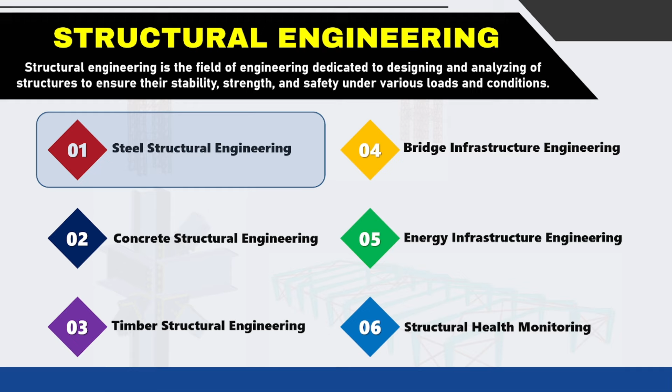Let us see various categories, various types of structures which come under steel structural engineering. The most important type of structure are industrial facilities, pre-engineered buildings. These are huge industries, huge PEB buildings made out of steel. Then you have steel frames for residential buildings, some of which are made out of steel skeleton, steel structure, steel framing.

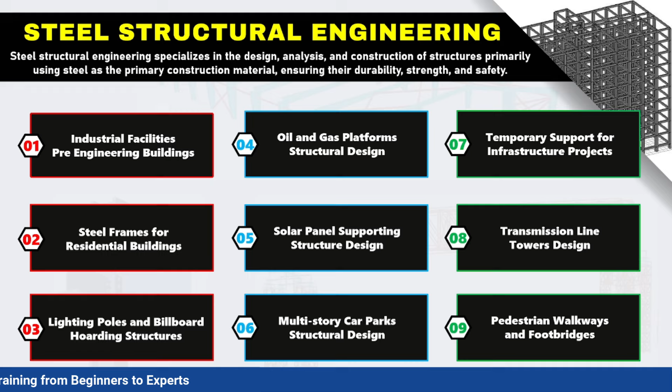You have lighting poles, billboard hoardings, advertisement hoardings whose structures are also made out of steel. You have oil and gas platform assemblies, solar panel supporting structural design, multi-story car parking, temporary structures for infrastructure projects, transmission line tower design, pedestrian walkways, and footbridges. These are a few types of structures made out of steel.

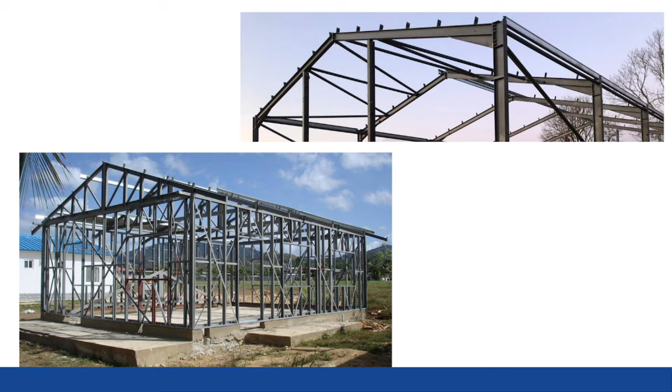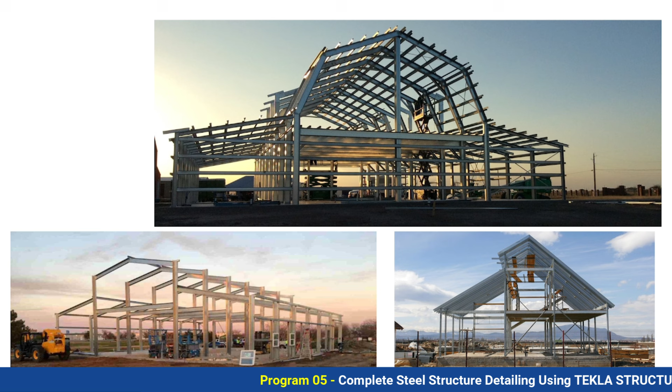Let us see some images to understand what a steel structure looks like. Here you can see steel warehouses, steel structures, industrial warehouses, multi-story industrial warehouses. You can also have these kinds of steel buildings, multi-story steel buildings, where the basic framing is made out of steel.

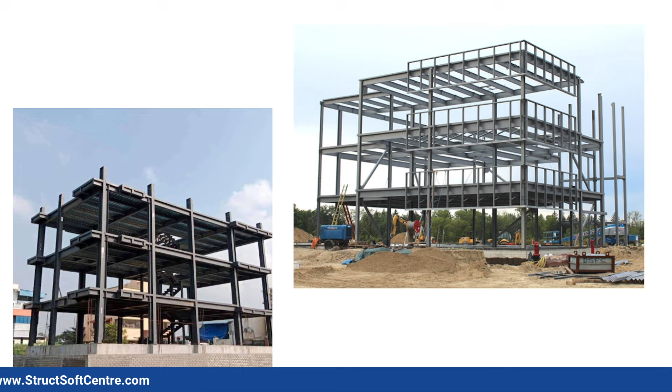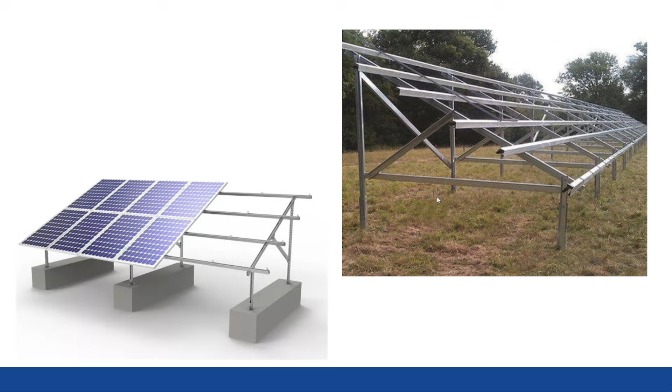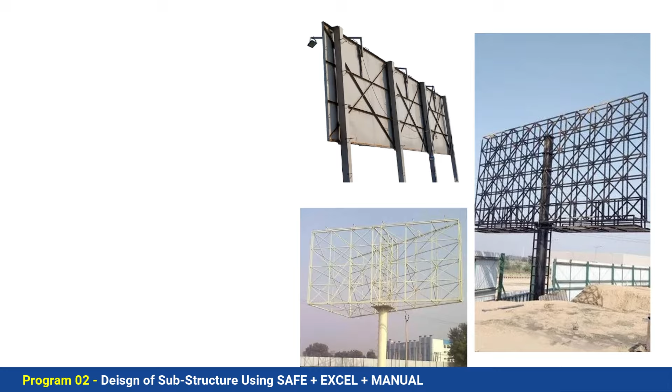Then you have transmission tower lines, billboard hoardings, advertisement hoardings, walkways, and foot over bridges. So these are a few examples of steel structures.

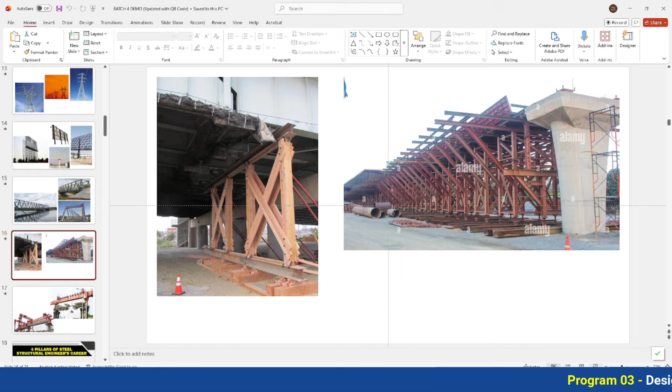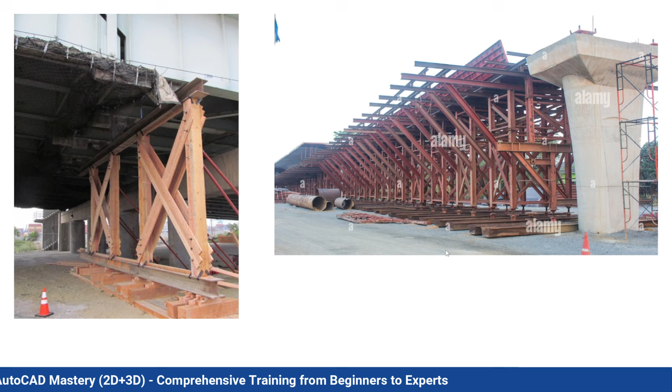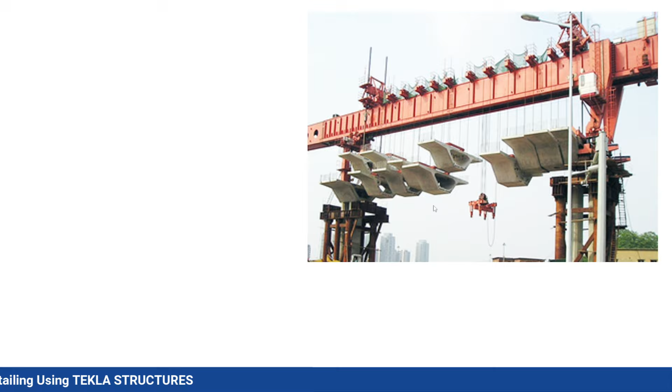Let us continue. So until now we have discussed various kinds of structures basically made out of steel. You can see here temporary structures, supporting structures, and launching girders. When constructing a segmental bridge, you have these launching girders which lift the precast concrete segments over here, and then they are connected by tendons. So this is also a steel structure, a launching girder.

So we discussed until now some examples of steel structures. The most famous amongst them are the pre-engineered buildings, steel buildings, steel warehouses, and some projects where infrastructure is being developed.

Now let us understand the four important pillars of a steel structural engineer's career. If you want to be a successful steel structural engineer in the market, these are the four skills you should have. Number one, you should have proper structural conceptual knowledge; all your concepts related to structural engineering should be very clear. Secondly, you should have proper knowledge of the design codes, the codal provisions used in your country where the structure is being constructed. The knowledge of these codes is very important.

Third, you have structural softwares. Nowadays we have huge and complex structures; it is not possible to design them manually as you have time constraints, and the accuracy required in these huge structures is very high, so you need the use of softwares. And finally, you should have experience working on real world projects. So these are the four important pillars which you should be strong in if you want to be a successful steel structural engineer.

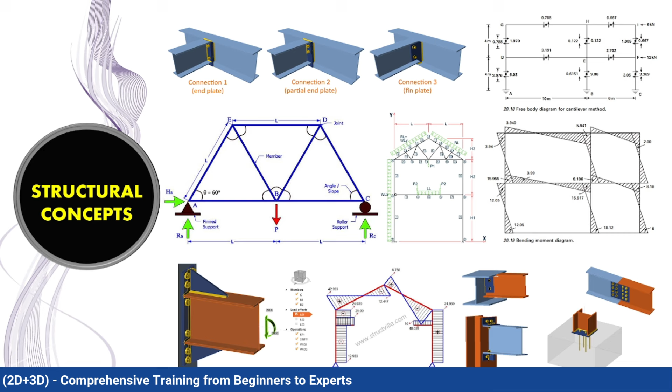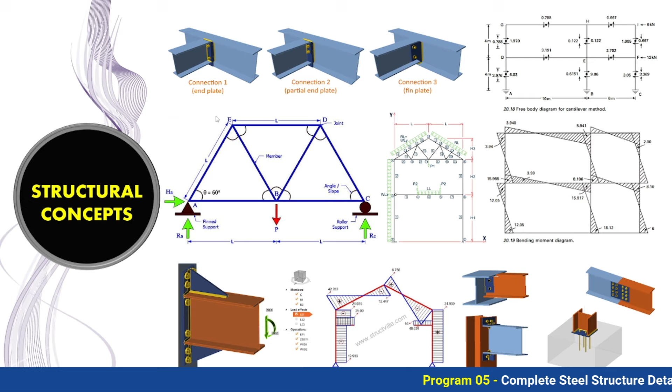Now let us understand each of these pillars in detail. So what are the structural concepts? Structural concepts deal with your understanding of how load is applied on the structure, how you can draw a free body diagram, what is SFD, what is BMD, what are the reactions from the applied load, what are the types of supports, whether you want a pin connection or a weld connection, a shear connection or a moment connection, and what kind of support you should have, whether a pin support, a roller support, or a fixed support. These are some of the basic structural concepts, and as a structural engineer you should have answers for all these questions.

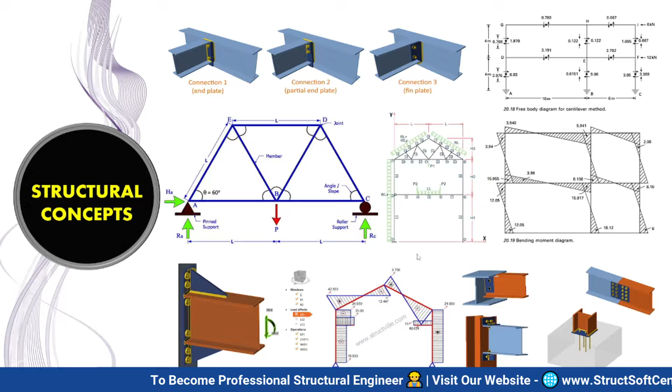Next, design codes. If you have all the knowledge related to structural concepts, you should also be aware of the design codes specifically in your country. We will discuss from the point of view of India. If you have any project in India and want to design a steel structure, you should have knowledge of the codal provisions. In India, we have IS 800 2007, the General Construction in Steel Code of Practice. If you want to design any steel structure in India, the design should satisfy this code. So as a successful steel structural engineer, you should have proper knowledge of this code.

Then you have other codes like IS 875 parts 1, 2, 3, 4. This deals with the loading being applied - it could be dead load, imposed load, wind load, snow load. And we have IS 1893, the code which deals with the criteria for earthquake resistant design. Then we have IS 808, another code which deals with the dimensioning of hot rolled members like beams, columns, channels, angle sections. This is the standard material available in your country. What specifications should that standard material meet? Those are mentioned in IS 808 - the cross-section properties of the members are mentioned in this code. So if you want to be a successful structural engineer, knowledge of all these codes is very important.

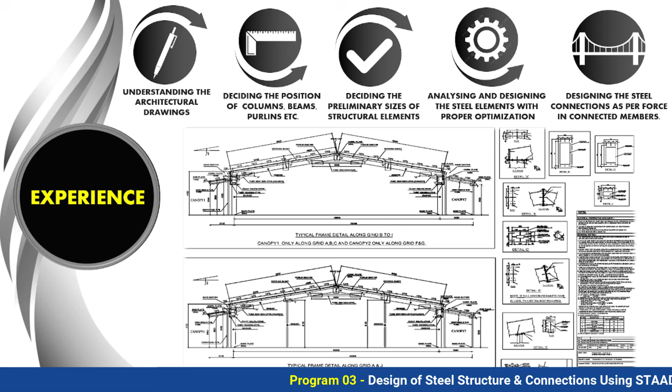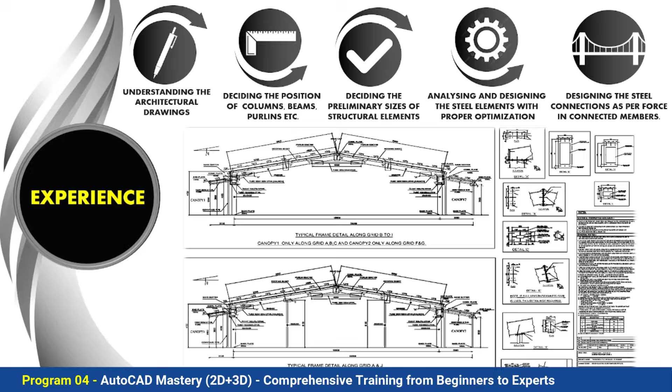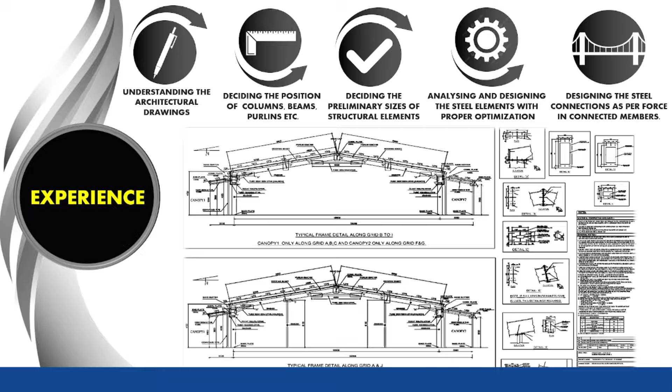Finally, the most important thing is experience. Until and unless you have experience working on real world projects, you will not be able to be a successful structural engineer. You should understand architectural drawings, how to read them, what inputs you get from the architect, from your client. Then based on those drawings, how you can decide the position of your columns, beams, purlins, how you can decide the preliminary sizes. Then finally, after applying all the loads and analyzing the structure, how you can optimize your steel design, and finally how you can give the output, give your drawings to your client, to the architect. This will only come after experience, when you work on real world projects, the actual projects.

So now I have a question to all of you. Do you have command over all these four requirements? Do you have good structural conceptual knowledge? Are you proficient with the design codes? Do you have knowledge of all the design codes? Do you have knowledge of the structural softwares? And do you have experience working on real world projects? I want everyone to answer in the comment section - do you have command on all these four requirements? Please answer in the comment section and let me know. Yes, no, what are your thoughts? Do you have knowledge on all these requirements? Do you have good structural concepts? Do you have a proper understanding of the Indian codes? Are you aware of these softwares? And do you have experience working on these projects? I want everyone to answer yes, no, whatever is your answer. Let's see.

Some of them have intermediate knowledge. Some of them have good knowledge. Most of you do not have knowledge related to steel structures.

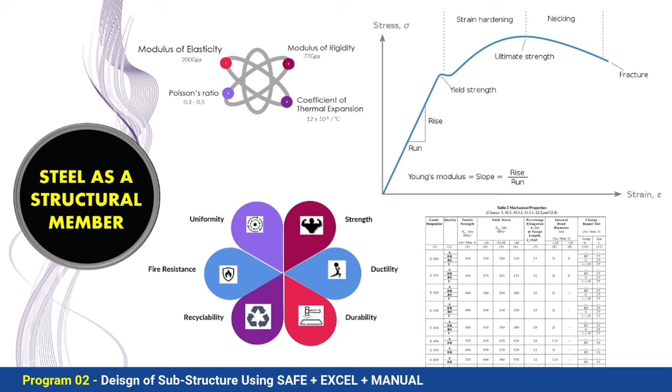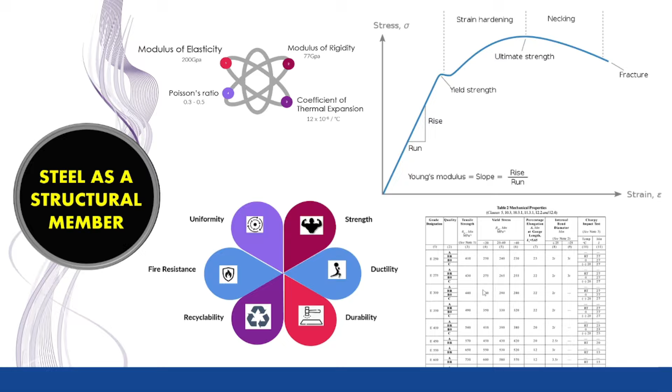Let us see what this is. Starting from the structural member, steel as a structural member, we will understand from the very basics the properties of steel, the stress strain graph, the advantages of steel, the various grades of steel available, and how you can use steel as a structural member.

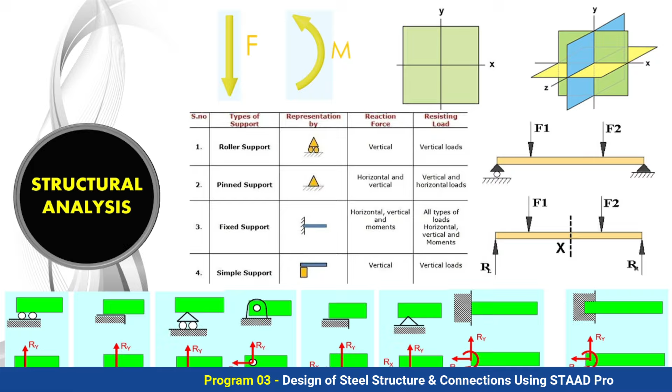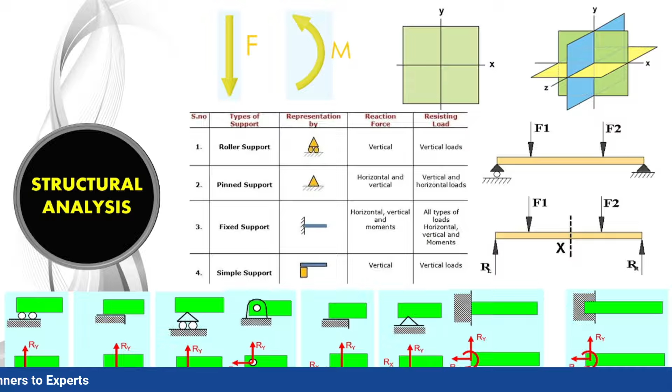Then we will move towards structural analysis, understanding how force is applied on your member, how moment is applied, what is a free body diagram, how you can convert your actual structure into a model in STAAD.Pro, what kinds of supports there are, and how you get reactions from those supports. All these basic conceptual things we will be covering, including shear force diagram, bending moment diagram, and all.

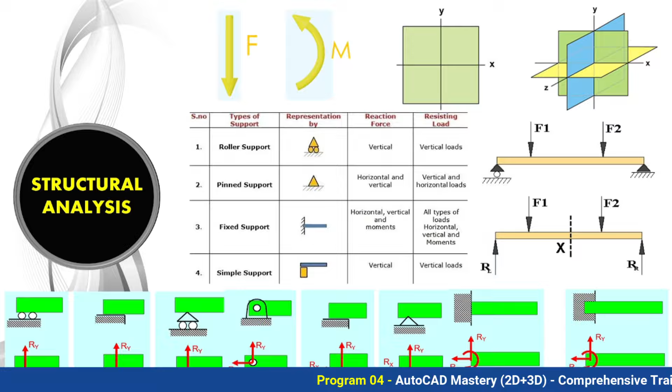Then we will move towards STAAD.Pro, the process of analytical modeling. From the very beginning, for people unaware of the software, we will start from preparing the geometry, applying the properties, applying the material, applying certain specifications, deciding the type of support, applying various kinds of loadings on your structure, then analyzing it for the given loading, then designing it based on the design code, and finally seeing the results. We will move one step at a time, slowly understanding all the concepts.

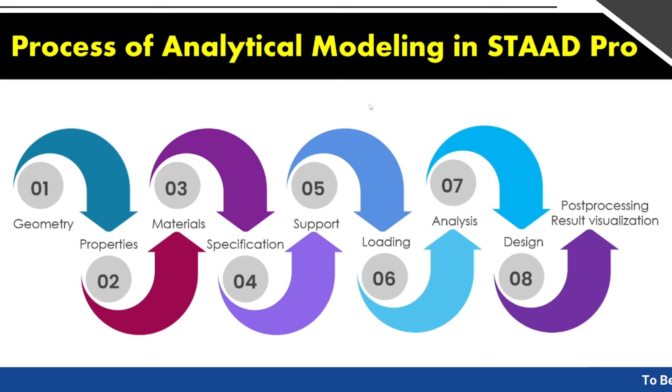Static and dynamic analysis in STAAD.Pro. We will start from 2D analysis, apply loading over it, and check the reactions. We will validate the software with manual calculations, seeing how the hand calculations match perfectly with the STAAD.Pro software. Once we understand that, we will be confident in using the software.

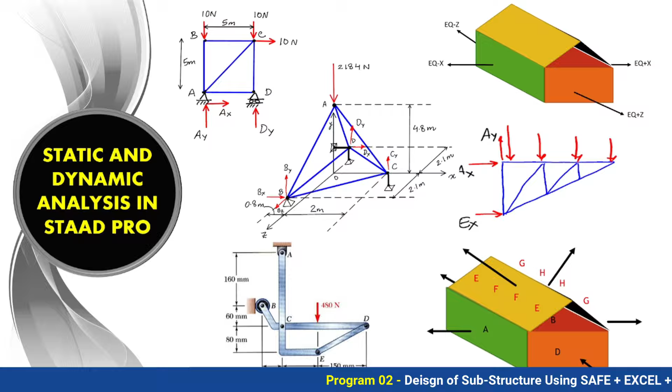We will be applying loads like dead load and live load, which are generally categorized as gravity loads on your structure. We will also be applying loads like wind load and earthquake load, which are categorized as lateral loads on your structure.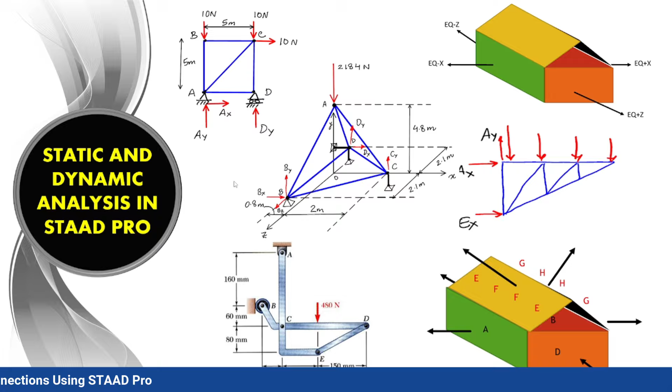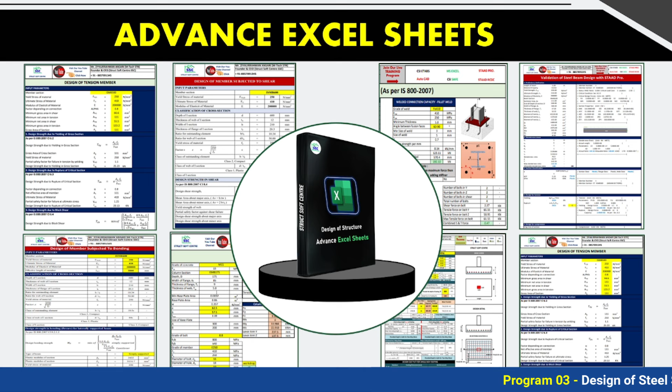I will also be sharing with you some advanced Excel sheets, which I have prepared by myself and my team. These Excel sheets will be very useful when you want to apply loading on your structure, apply load combinations, or apply certain design parameters. This Excel will be very useful and all these Excels will be shared with you.

After completing the beginners level, all of you will be confident in designing and modeling any kind of steel structure in STAAD.Pro and applying all loads over it. Once we complete the beginners level, we will move towards the intermediate level.

Intermediate level will specifically focus on designing of the structure, understanding the codal provisions, and designing of the connections. In beginners level, we dealt with analysis, and in the intermediate level, we will deal with the design. This is a proper systematic way in which we will progress. Let us see what the intermediate level would be covering.

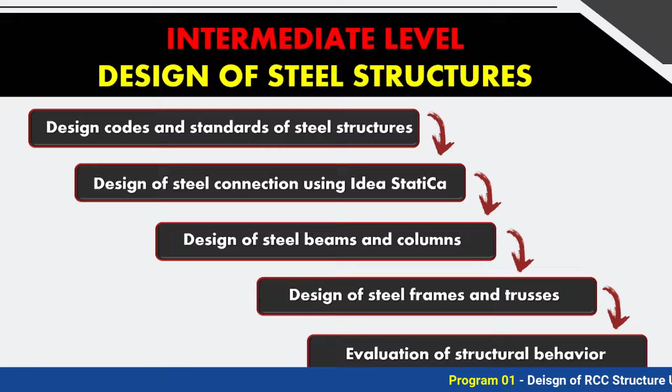First, we will understand the codal provisions IS 800, IS 875, IS 1893 in detail. We will validate the manual hand calculation for design of beams and columns with the STAAD.PRO calculations. We will be using Idea StatiCa software for designing of the connections. Finally, we will also understand how you can evaluate the overall structural behavior. Let us understand them step by step.

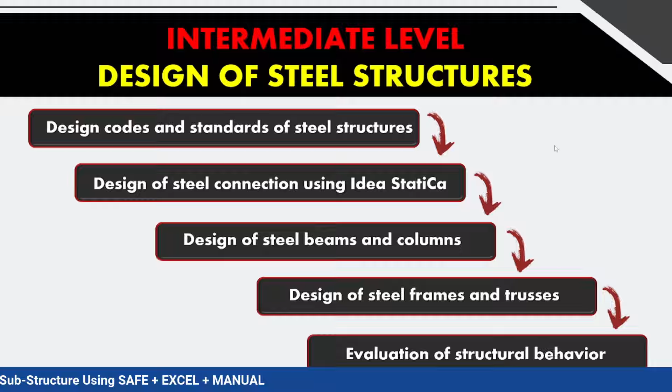Design process in STAAD.PRO - this we will deal with in detail. Whenever you are designing any kind of member in STAAD.PRO, first it will check its slenderness, then classify the member based on section classification, then the member will be checked for tension, then compression, then shear, then bending, and finally the combination of all these forces will be checked.

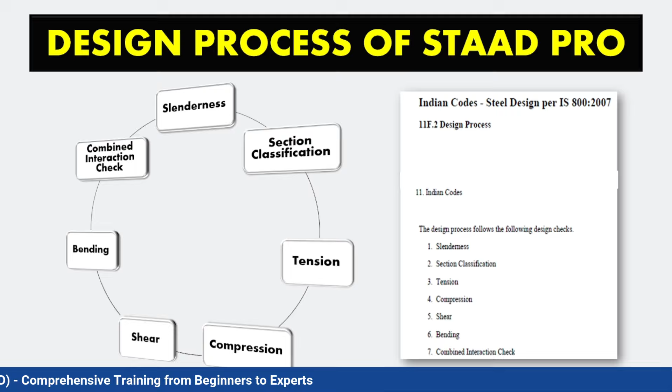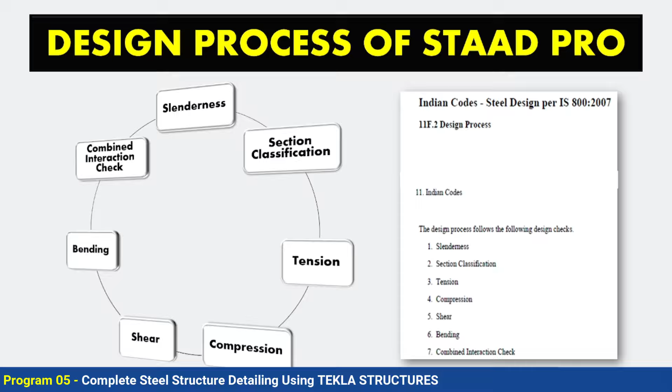This is the brain of your STAAD.PRO. This is the back processing which happens in STAAD.PRO. So we will not just understand how to use this software, how to manage it, how to click buttons. This is not just a software learning course. We will understand as a structural engineer what happens behind the software, how the software gives you the answer, what the software does. You should be able to understand what is being done by the software. So all these things we will be understanding in detail and we will validate these results with our manual calculations.

Many of these courses only teach you how you can click on the buttons and design any kind of structure. But this is not at all important. The most important thing is to understand how the software behaves, how the things are being done.

Design parameters in STAAD.PRO - STAAD.PRO is just a tool, it is just a software. If you give some wrong input to it, you will get the wrong output. The most important thing is to understand what inputs you give to the software. So if you want to design your structure based on the Indian codes, there are certain design parameters which you should mention to the software. 90% of the engineers are unaware of these design parameters. They don't know how these design parameters act.

I will be teaching you each and every design parameter in detail. Here I have just listed a few of them, but in our course we will be discussing each and every design parameter related to the Indian code IS 800, and we will understand the importance of each and every design parameter.

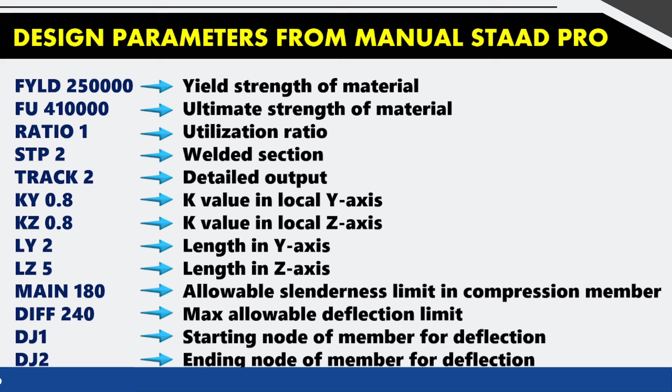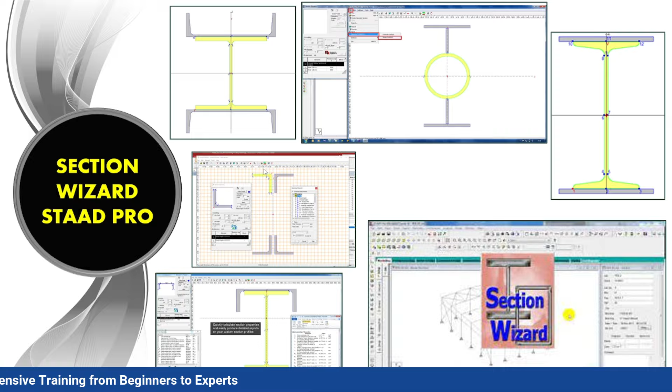Then the section wizard - this is the tool which makes STAAD.PRO stand out in the market. This is a very important tool, section wizard. Now you can see whenever you are designing any kind of steel structure, most of the members are not general members - you might be having combinations. For example, here you can see there are four angle sections which are connected. In the above figure, you can see you have I section plus channel section. Here you have this circular section plus I section.

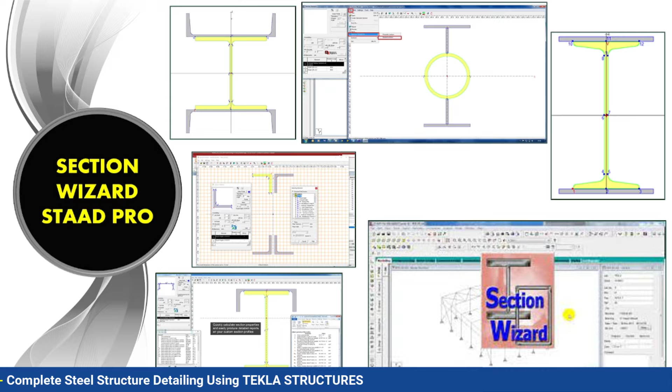Here you can see you have I section plus top and bottom plate. You have I section and a channel. So this is a tool in STAAD.PRO called section wizard. This tool is capable of designing your structure also for these complex custom modified members. So we will understand how you can prepare these custom modified members and we will be designing our structure for these members - not only the standard members but also these complex members which we will be preparing by using section wizard. I will be teaching you this tool in detail and I will also explain when you can use these custom modified members.

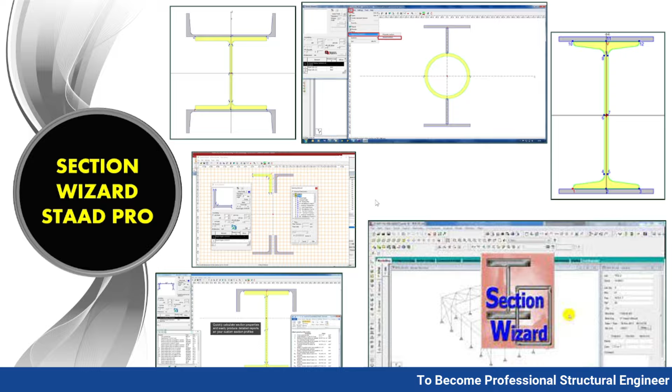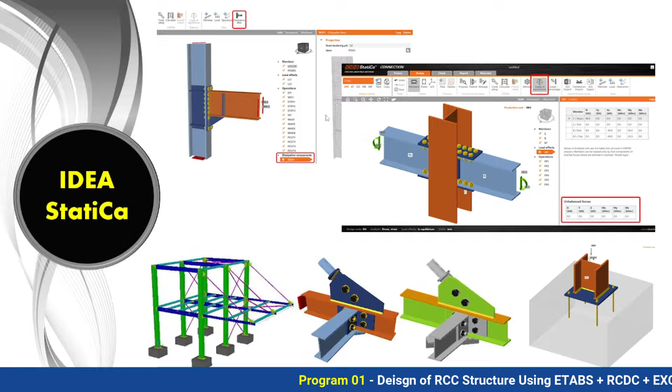After designing of the members, after designing of the structure, the next topic is the designing of the connection. In STAAD.PRO, only the member will be designed, but you also have to design the connection between two members. For example, you have a column and you have a beam - you also need to design the connection between them. You could have a welded connection or a bolted connection, a shear connection or a moment connection.

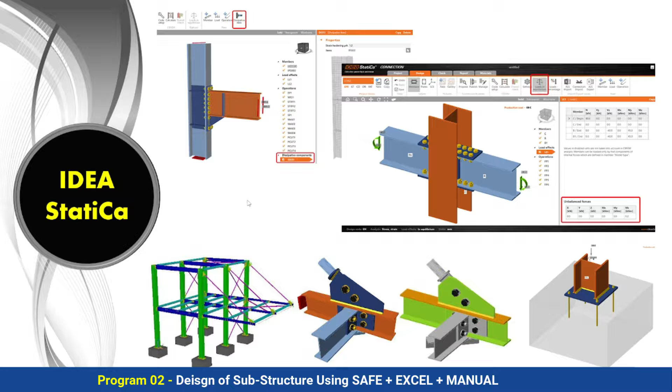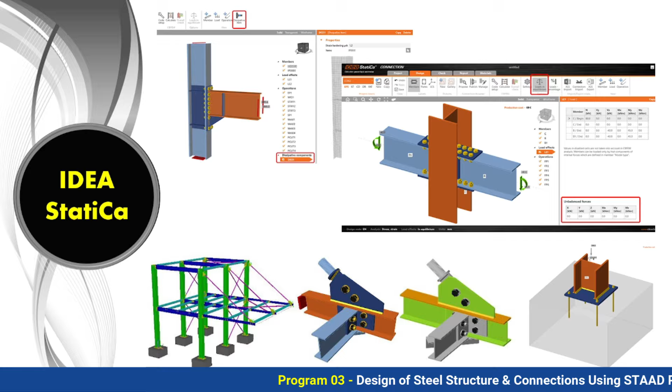All these things I will be teaching you in detail in this software called Idea Statica. We also have another software called RAM Connection, but that software is not very user friendly. Nowadays in the market, Idea Statica is becoming more and more popular, and all of the MNCs are now using this software. It is very user friendly and has a lot of advantage over RAM, so I will be teaching you this software in detail, which will help you apply for jobs in multinational companies.

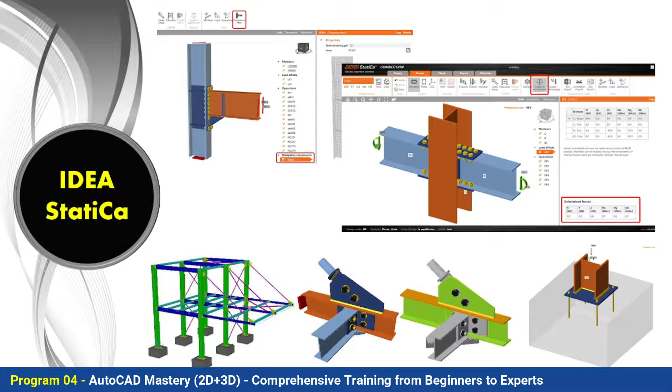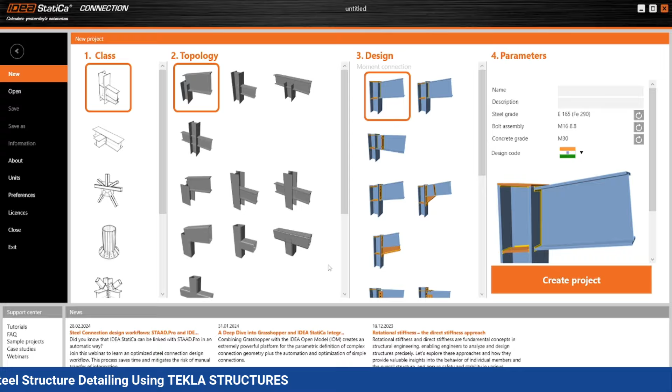I will be explaining all the conceptual things, whether you have to design a pin connection or a fixed connection, how you can design a shear connection, how you can design a moment connection. All these topics will be covered. This is the interface of Idea Statica. Here you can see shear and moment connections, all the differences we will understand in detail, whether you go for bolted connection or welded connection, whether you go for cleat angle or a moment connection. Roughly, let me tell you the difference.

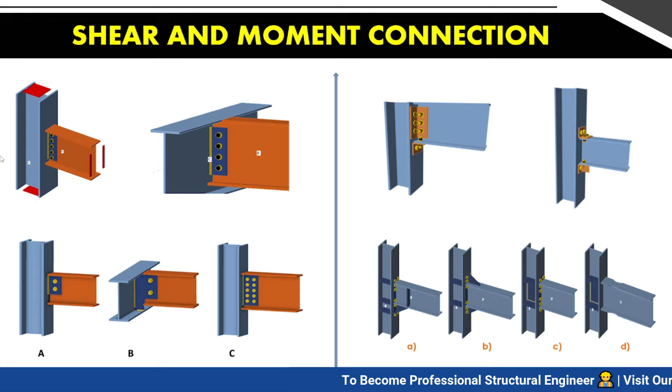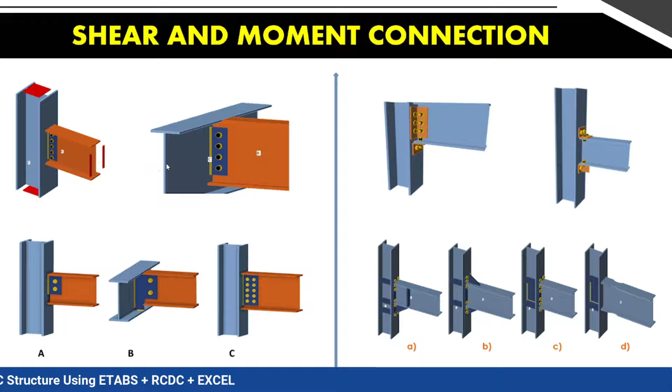Here on the left hand side you have a shear connection where only your web is connected to the column. Here also only the web of the beam is connected to the primary beam. Your flange is free, so this is an example of shear connection where your moment will not be transferred to the column or the beam. But in the second example, your web is connected as well as the bottom flange, and here top and bottom flange is connected. So these are examples of moment connection where your flange movement is not allowed, and the moment generated will be transferred to your column.

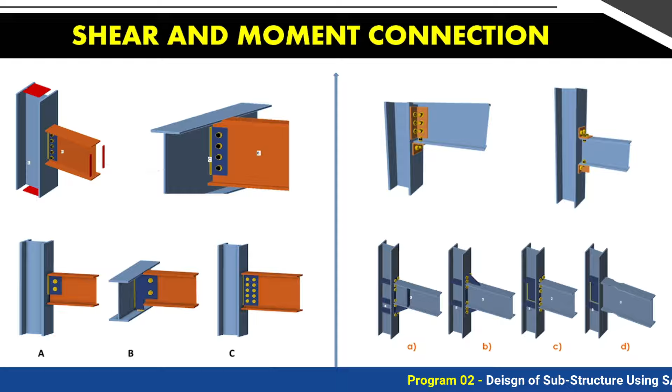So all these things we will be dealing with in very detail and understand when you can use moment connection, when you can use shear connection, what is the difference, what are the advantages, what are the disadvantages, all these topics we will be covering. When to go for welded connection, when to go for bolted connection.

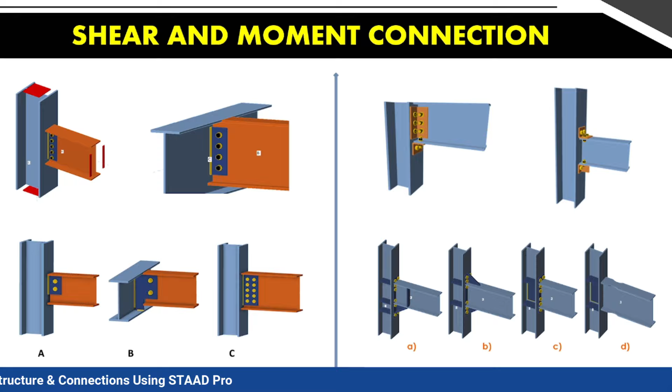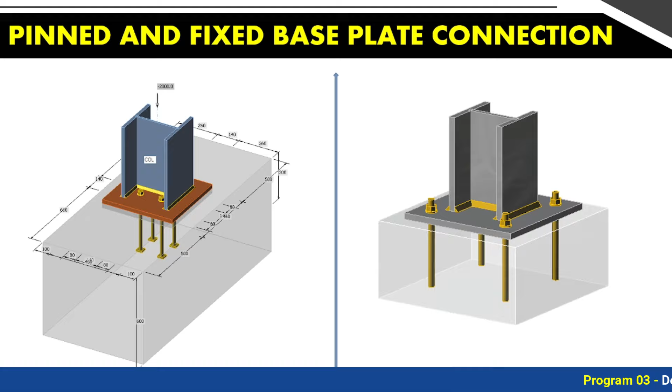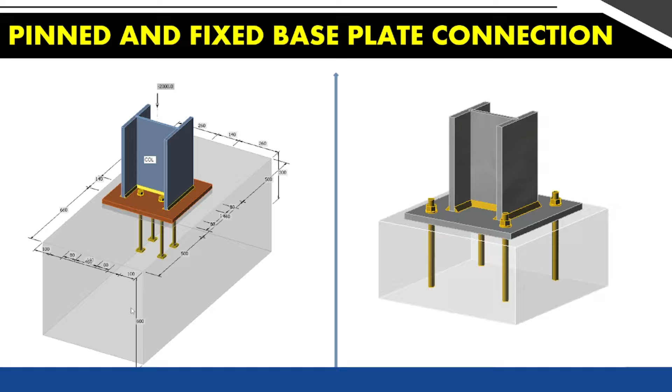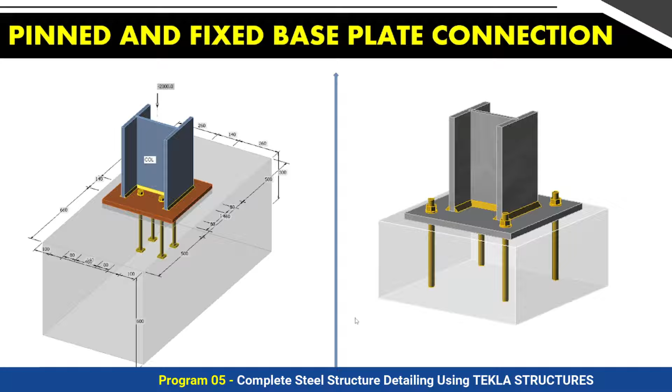Next thing, base plate. Many of you may not understand the difference between the pin connection and the fixed connection. On the left hand side, the bolts, the anchors, are near the web and inside the flange. In the second example, the anchors are outside the flange. So the first one, the left hand side, is an example of a pin connection where there will not be any moment transferred to your footing. But in the second example, the anchors are outside the column, and in this case the bending moments will be transferred to your footing. We will understand how all these things work.

After completing the beginner's level and intermediate level, you will have all the knowledge and will be capable of designing any kind of structure. In these levels we will complete everything related to analysis and design of steel structure and design of its connections. We will understand STAAD.Pro, Idea Statica and Excel, everything in detail.

And finally the advanced level. This is only there so that we can implement whatever we have studied in the beginner's and intermediate level. Here we will be working on real world projects, the actual projects which are constructed, and I will show you how you can proceed.

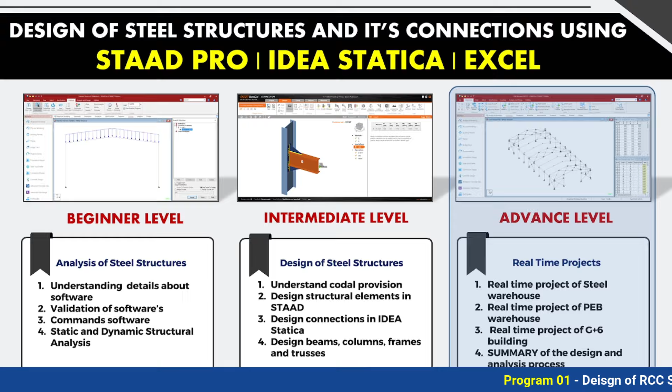We will be working on four projects: analysis and design of steel warehouse, analysis and design of PEB structure, analysis and design of G+6 steel building, and a summary of them. I will also be covering one truss and trestle assembly course.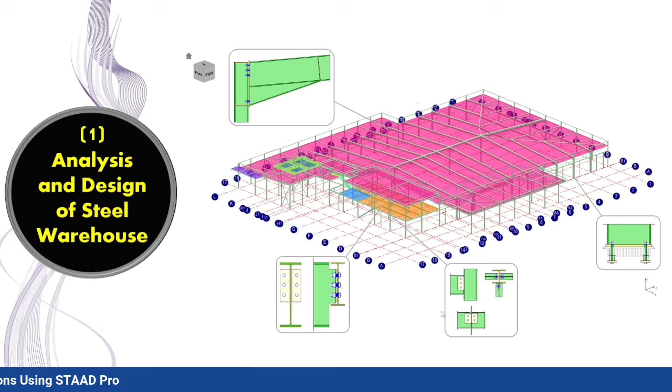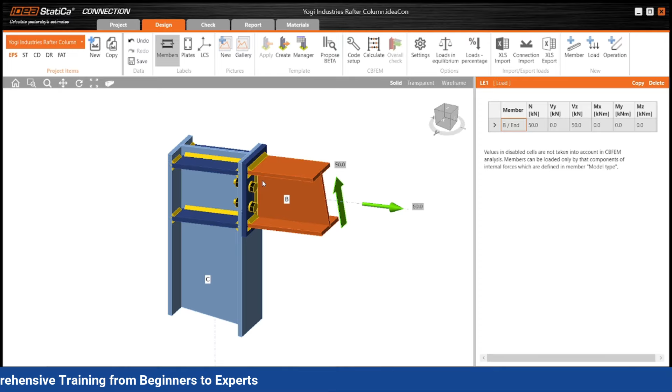This is my first project, design of steel warehouse. I will explain how you can design this kind of structure. All these important steps I will teach you one by one. You can see this is the drawing which we receive from the architect, how you can read the drawing, how you can prepare the model. Once you prepare the model, how you can prepare the drawings, how you can design them, how you can design the connections between the column and the rafter, how you can design the drawings. All these things I will be sharing with all of you.

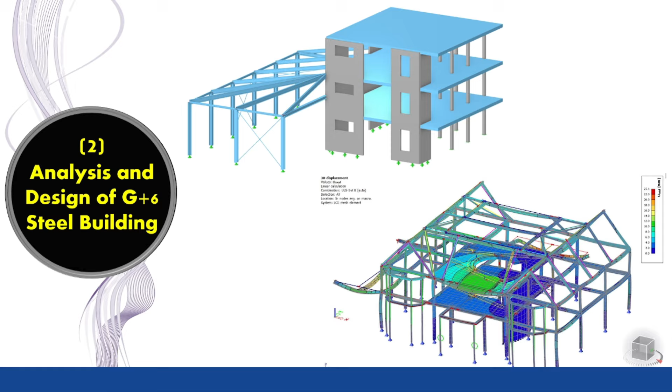Here you can see a few pictures. The second project will be a G+6 steel building with a gantry covered in this. One more thing we will be covering is how you can design your steel warehouse for crane load and gantry load.

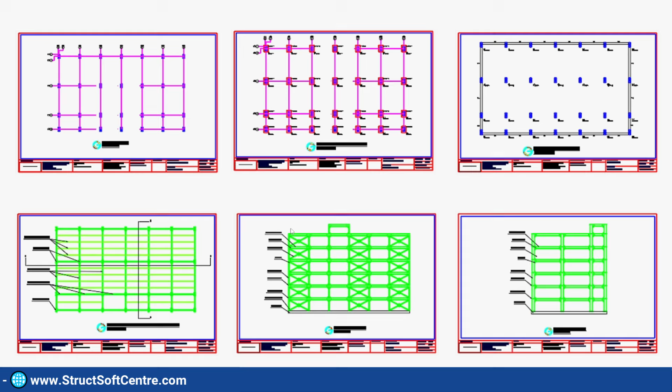For a steel building, you can see over here, we will be designing this G+6 steel building in STAAD.Pro, preparing its drawing, and designing its connections.

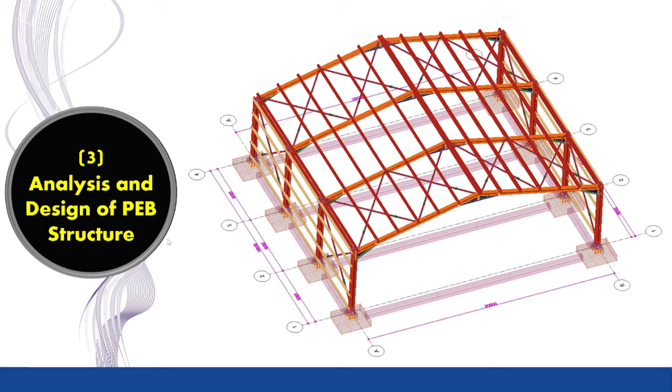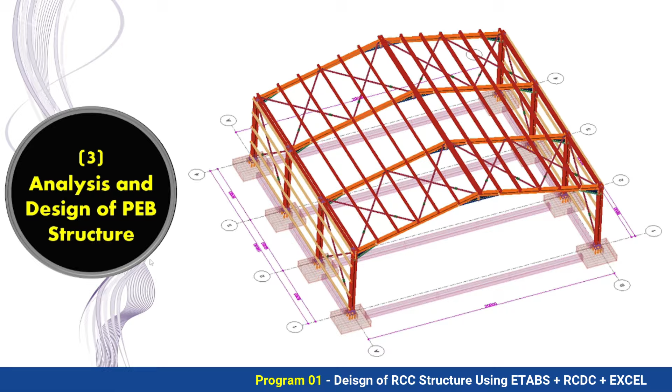Now we have analysis and design of PEB warehouse, PEB structure. I will explain what a PEB structure is, how you can use tapered sections, and in this we will also be modeling the gantry crane, how to apply the load of this moving crane on your structure, and how to design this crane.

I will be sharing with you the drawings and documents we get from the architects, and how you can go about modeling them.

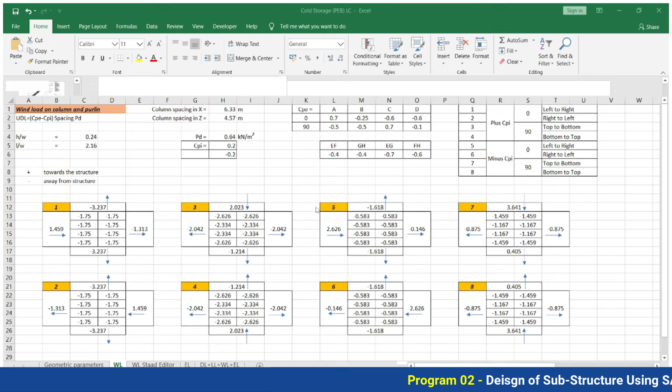These are the advanced Excel sheets I will share with you, showing how you can apply dead load, live load, wind load, earthquake load, and load combinations directly from our advanced Excel. Then we will move towards connections.

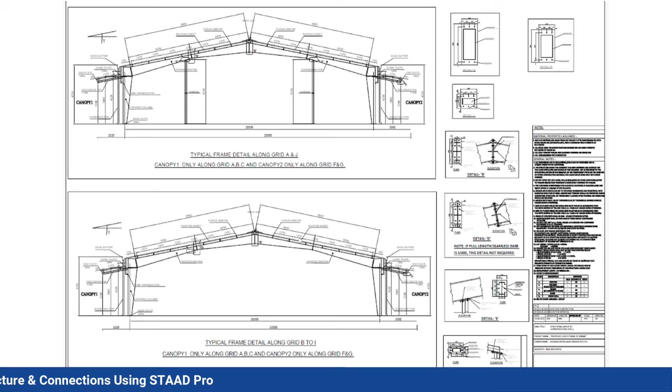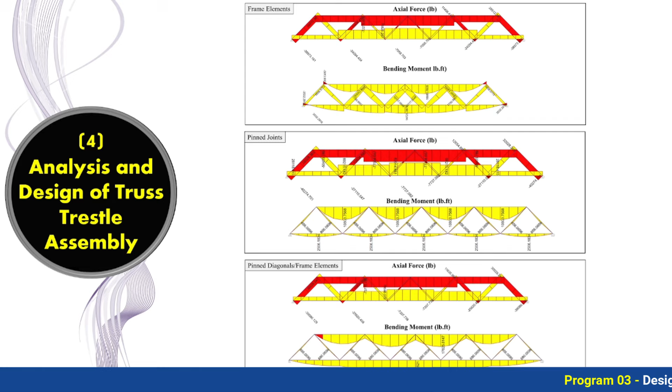And finally, analysis and design of truss and trestle assembly. This is one of the projects where we designed trusses and trestles for a railway project. You can see this is the truss and certain trestles.

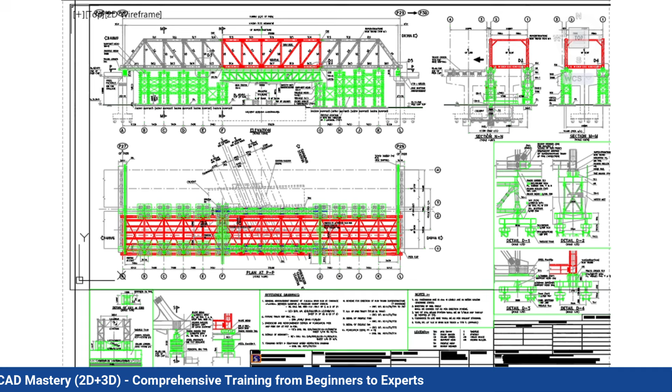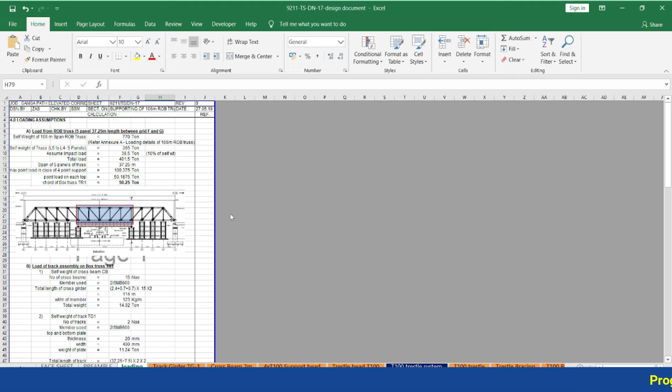This is the drawing. This was the permanent structure which was constructed, and for this construction we had given this green part below, which is called the temporary structure, for the erection of the permanent structure. So we have designed this temporary structure. This was a very big project, but we will cover a part of it.

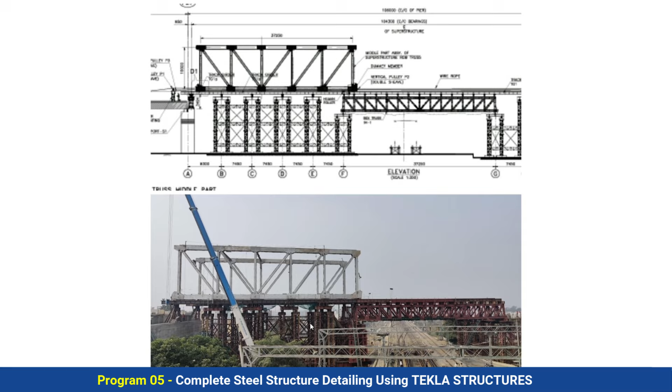Here you can see the drawing, and this is the actual execution. So we will understand how you can design this truss and trestles. A part of this project will also be covered. Here you can see this thing we will be designing.

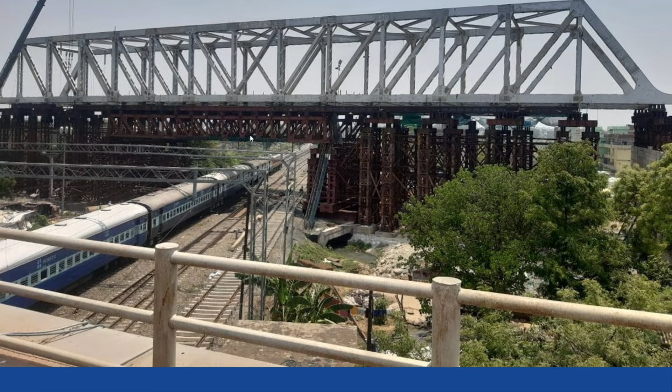So I've explained what we are going to cover in this course, and the important topics we will be covering. Everything will be covered, starting from steel warehouse, PEB warehouse, G+6 steel building, how you can design your warehouse for gantry loading and crane loading, how to apply wind load, how to apply earthquake load, and how to design connections using Idea StatiCa.